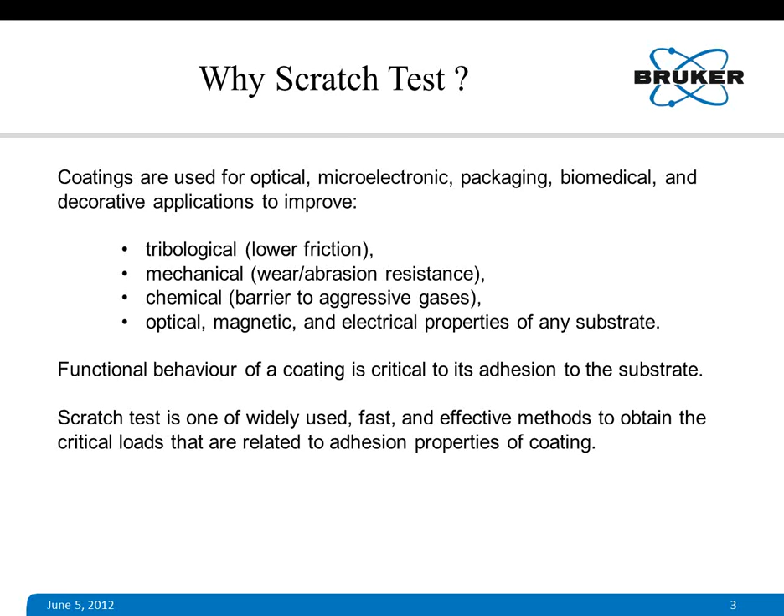Scratch test is widely used. It is a relatively fast process for evaluation of coatings and an effective method to obtain critical loads that are related to adhesion properties of coating.

Although scratch test is used for scratch adhesion properties of any coating, it is also used for measurement of hardness of any coating as well as bulk material. Although this seminar is mostly based on scratch adhesion test, I just wanted to introduce the scratch hardness test at the very beginning, just to mention that there is a scratch test which can give you scratch hardness of coating or materials. I will not cover this part in detail.

Those who are interested can refer to ASTM standard G171. In this scratch hardness test, what we do is take a sample and a reference sample—sample of coating or bulk material—use a stylus with a certain constant load, make a scratch, and measure the scratch width on the specimen. You repeat this test on a reference specimen whose hardness is known, say for instance fused silica or some polymeric material for low hardness specimens, and use an equation to obtain the hardness of the specimen.

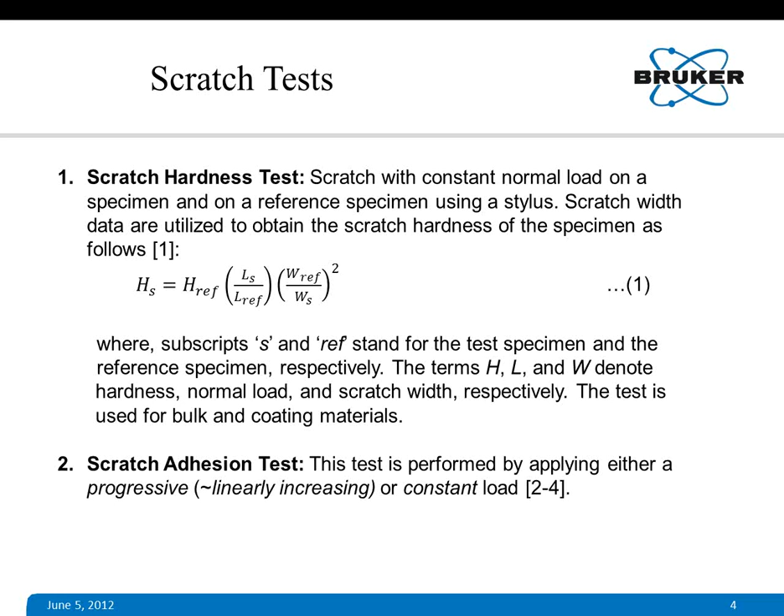Scratch adhesion test, the topic for today's seminar, is done by two different ways. One is progressive scratch test, where a linearly increasing load is applied during scratching, or constant load scratch test, where load is basically constant.

Progressive load scratch test is shown on this view graph. You can see there is a stylus used for this scratch test. It started somewhere at some point on the coating, and is dragged over the surface of the coating with linearly increasing load. Normal force, which is the load, and tangential force, or friction force or Fx, these two things are measured. After the test is done, optical microscope is used to have the image of the scratch. From the image, we can imagine where this coating is failing.

There are failures. Different types of failure modes may be present in a particular scratch test on a particular coating. We also measure other parameters such as acoustic emission or electrical surface resistance or contact resistance of this coating. The normal load corresponding to a particular failure mode is called critical load, denoted as LC. There may be several critical loads for a particular system or scratch test, and that's why they are known as LC1, LC2, LC3, and so on.

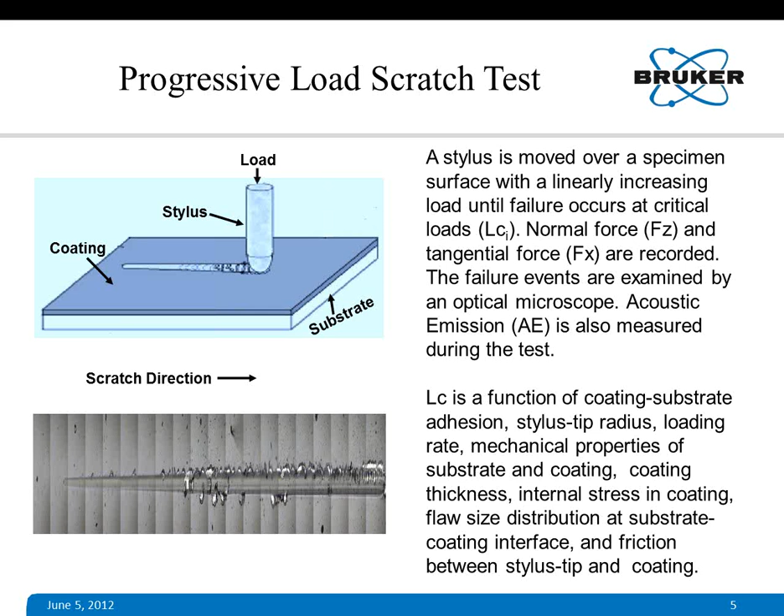On the other hand, constant load scratch test is done, as it implies, with a constant load. Load remains constant and you scratch at different load levels. So a series of scratch tests are performed with constant normal loads each time, but the level may be different, until a point where failure of the coating occurs. Each scratch is examined with an optical microscope for failure.

Sometimes the force, that is tangential force Fx, or other parameters such as acoustic emission or electrical contact resistance also exhibit sudden changes at the point of failure. They can also be used to pinpoint at what point failure is occurring.

The load at which such failure of the coating occurs is termed the critical load again. Constant load test requires more time because you have to do several scratches, a series of scratches, but it provides greater statistical confidence. Progressive load test is suitable for rapid assessment and quality assurance of coating. Hence, it is more popular for research and development work on coating processes. In this presentation, I will concentrate mainly on progressive load scratch test.

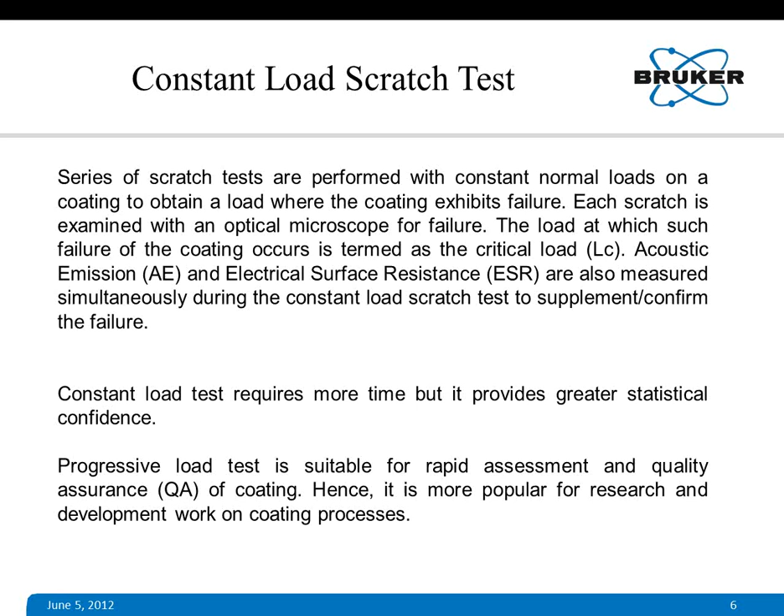Coating failure modes during scratch test. There could be two different types of coating failure. One is called cohesive failure, shown here on the right side. Cohesive failure means the coating fails itself; an example is through-thickness coating cracks. It doesn't fail through the interface of coating and substrate.

When it fails through the interface, that is called adhesive failure. Examples are buckling, spallation, chipping. Adhesive failure actually happens due to compressive stress present ahead of the crack or stylus tip, whereas cohesive failure happens with tensile stress. Tensile stress is the major driving force for cohesive failure.

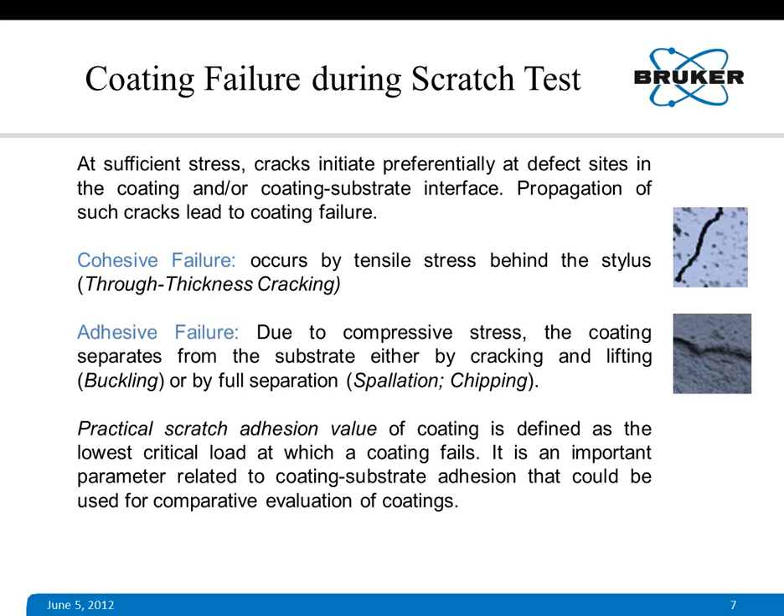Practical scratch adhesion value of coating is defined as the lowest critical load at which a coating fails. It is an important parameter related to coating-substrate adhesion that could be used for comparative evaluation of coatings.

Let's examine some of the damage features, how they look when you do a scratch. There will be several failure modes, several of them referred to in the literature, especially in ASTM standard C1624. Those who are more interested can refer to those standards. I tried to put together some slides here to show some of the major damage features.

I categorized them into two different things. One is like cohesive failure, like through-thickness cracking, such as brittle tensile cracking. These types of cracking can have nested micro cracks open to the direction of scratch. They can be straight, like chevron cracks, or they can be in the form of an arc, as arc tensile crack, as shown on the right side of this view. There can also be Hertz cracking, a series of nested micro cracks within the scratch groove.

There can be conformal cracking, micro cracks that form while the coating tries to conform to the groove. These open away from the direction of scratch. The direction of scratch is this way, and the conformal cracks open in the other direction.

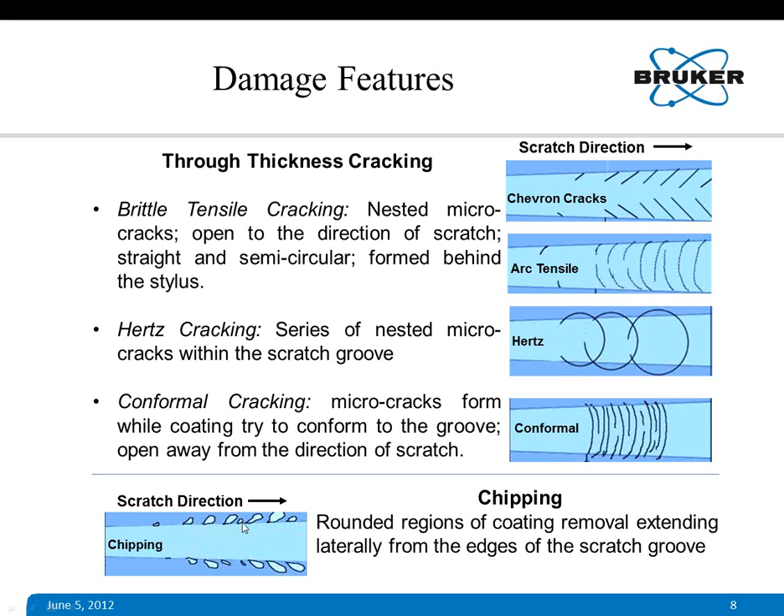Other types of damage features are chipping, which are related to adhesion failure. The chippings are rounded regions of coating removal on the surface of the coated specimen, extending laterally from the edges of the scratch groove.

Some other damage features related to adhesive failure are buckling, wedging, recovery, and gross spallation. These mostly happen due to compressive stress on the coating. Coating buckles ahead of the stylus tip, forming irregularly wide arcs with patches missing on the coating surface, and they open away from the scratch direction.

Wedging is similar, but here these are more pronounced patched areas where coating is actually removed by wedging. They form annular structures and open away from the scratch direction.

Recovery: regions of detached coating along one or both sides of the groove, oriented along the direction of the scratch, produced by elastic recovery behind the stylus and plastic deformation in the substrate. And gross spallation, where large detached, delaminated regions of coating occur, typically where the coating has very low adhesion strength, such as a ceramic coating on a substrate.

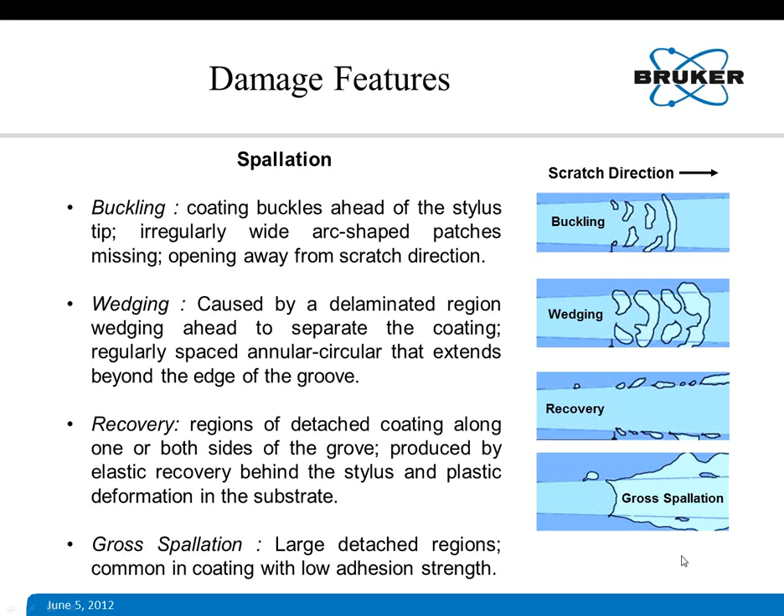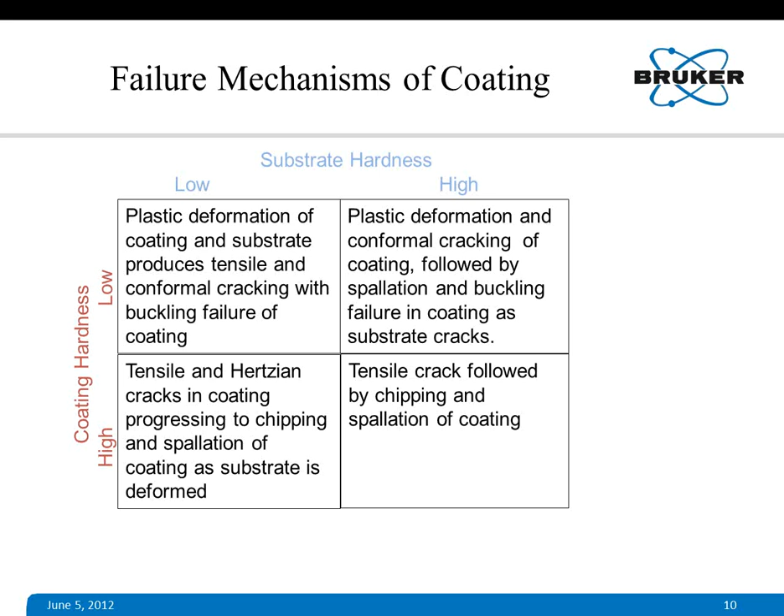Now we'll go through some of these scratch models available in the open literature. The Benjamin and Weaver model proposes two approaches, basically based on tangential force measurements at the tip, which is Fx, sometimes called friction force, and also based on normal force.

The first model, shown in equation 2, expresses the tangential force Fx in terms of hardness of the coating and substrate, Hs and Hc. Hs is the hardness of the substrate and Hc is the hardness of the coating. D is the scratch width, t is the thickness of the coating, and R is the radius of the tip, the stylus.

There are three terms in equation 2. The first term denotes the plowing force required to deform the substrate, and the second and third terms denote the force to remove coating from the surface and the plowing force required to displace the sheared film, respectively.

If we can find Fx, with Hs and Hc known, thickness of the coating T known, and scratch width D found, we can find the critical shear stress at the point of failure. That critical stress could be used for comparing several coated specimens. This particular model worked well for metal coated on glass specimens, especially aluminum, but it doesn't work for some other coating systems.

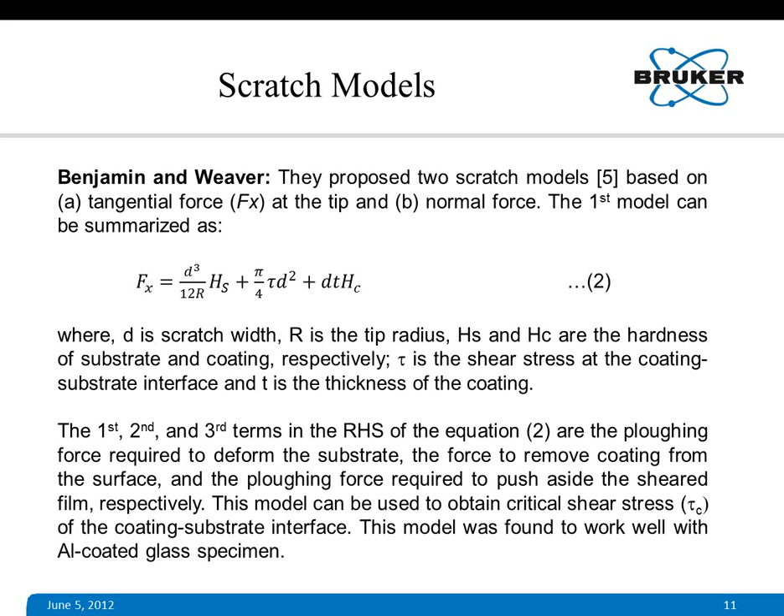The second model Benjamin and Weaver proposed was based on normal force, shown in equation 3, expressing the shear stress at the lip of the stylus tip in terms of hardness and contact radius between the tip and the coating, A, which is basically half of the scratch width.

This model gives a measure of adhesion in terms of critical shear stress by substituting A measured at the critical load.

Later, Ollivier and Matthews modified the second model of Benjamin and Weaver, equation 3, by replacing Hs with Fz, the normal force, divided by pi A squared, where A is the contact radius, half of the scratch width.

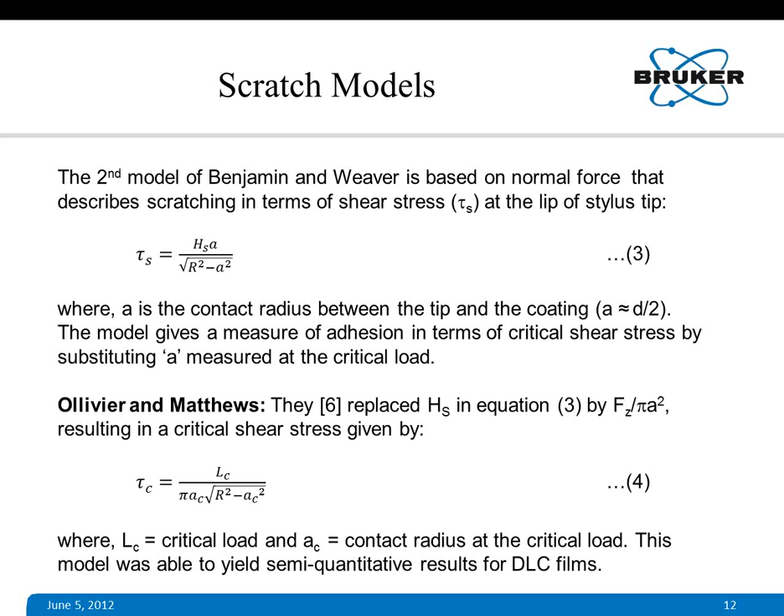They gave an equation shown as equation 4: tau c equals Lc divided by pi times Ac times the square root of R squared minus Ac squared, where Lc is the critical load and Ac is the contact radius at the critical load. This model was able to yield semi-quantitative results for DLC film, diamond-like carbon film.

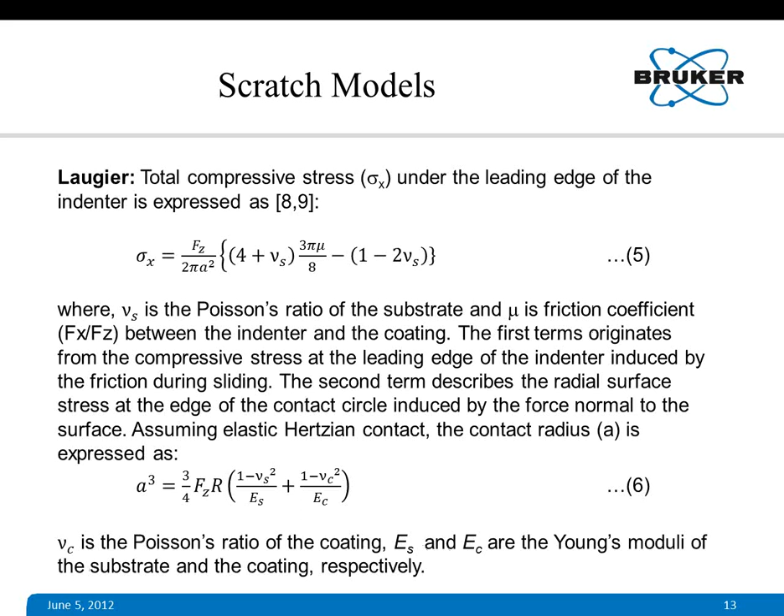Assuming elastic Hertzian contact, the contact radius A is expressed in equation 6 by Laugier. Using equations 5 and 6, we can calculate the critical shear stress of the coating, that is adhesion stress basically.

When this contact radius is very small compared to the radius of the tip, shear stress can be expressed as equation 7, tau is more or less equal to sigma x into A by R. So if we can find the tangential force at the critical point, we can obtain or calculate the shear stress, which in turn will give you the adhesion strength of the coating.

Laugier later on also introduced work on adhesion for any particular scratch test, which relates to adhesion strength of any coating substrate system. They expressed W equals sigma c squared by 2 EC into T, where sigma c is the critical shear stress, EC is the Young's modulus of the coating, and T is thickness.

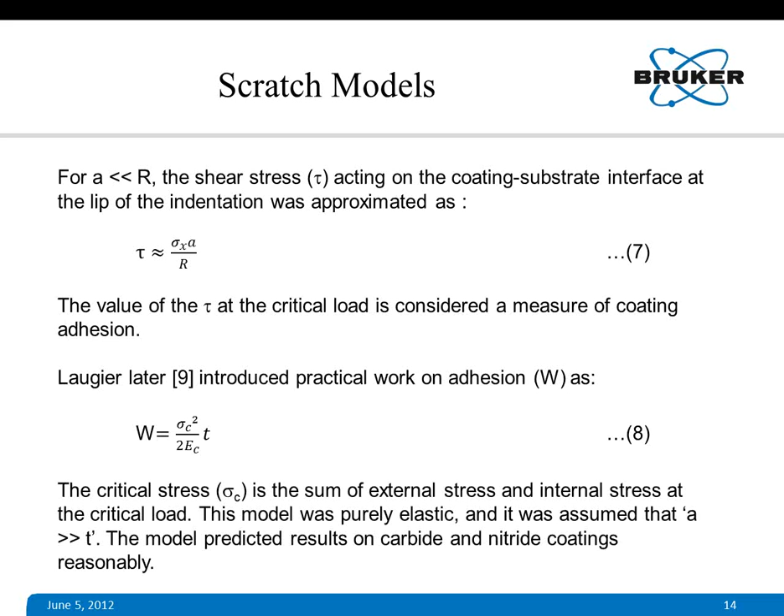This model predicted results on carbide and nitride coatings reasonably well.

Later on, Burnett and Rickerby considered elastic plastic indentation stress, internal stress, and tangential force, and put forward a model for calculating the critical load LC equals pi d squared divided by 8, into 2 ECW by T to the power half, as expressed in equation 9, where W is the work of adhesion, and this is everybody's aim to find out for any coating substrate system.

EC is the Young's modulus of the coating, and T is the thickness, and DC is the scratch width at the critical load. So if LC can be found out by a scratch test, and all other parameters are known, W can be calculated using this model.

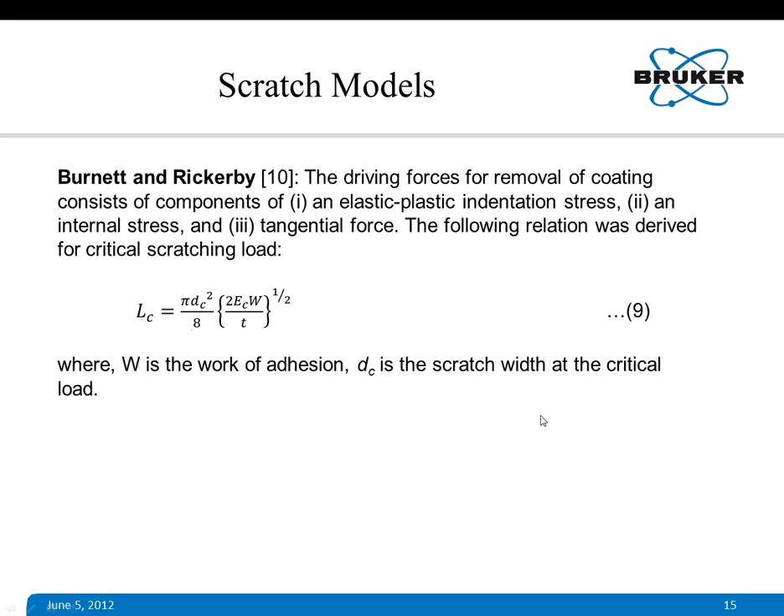Bull et al., S.J. Bull, they have worked a lot on this coating system, and they define critical load by replacing the area term in equation 9, pi d squared, with AC by nu c into mu c, where nu c is the Poisson's ratio and mu c is the friction coefficient, also called the drag coefficient, friction drag coefficient, or stylus drag coefficient.

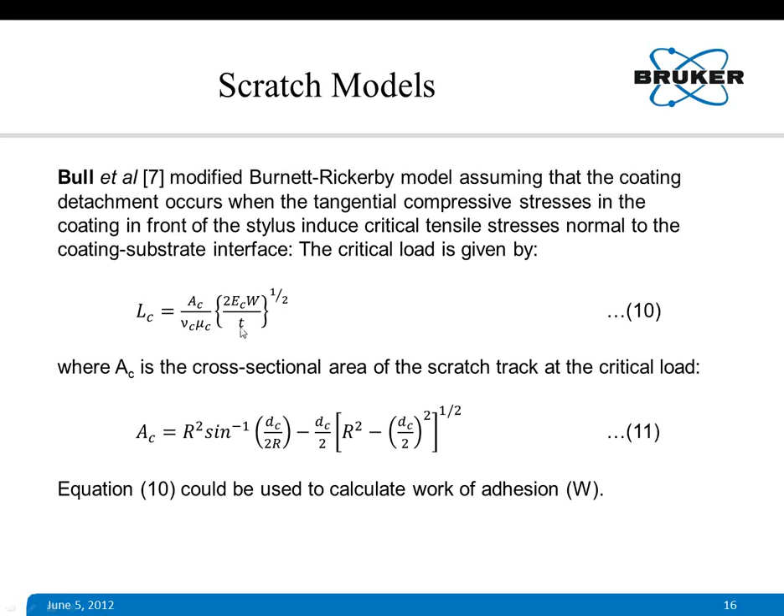A is the area, the cross-sectional area of the scratch track at the critical load, A is AC, and AC is actually expressed in equation 11. Using equations 10 and 11, this is the total model, we can calculate the work of adhesion.

Although we have several more models, which will be very difficult to cover here in this short webinar, all these existing models invariably use some assumptions and simplifications to deal with the inherent complexity of any scratching process, which involves a large number of variables. Hence, the existing scratch models experience great difficulties giving a complete analytical description of the mechanics of scratch testing.

Predicted scratch adhesion values from such models differ widely from the actual scratch test results. Evaluation and fine-tuning of such scratch models certainly requires continuous developmental effort, with an objective to obtain a standard model that would give a comprehensive description of any scratching process.

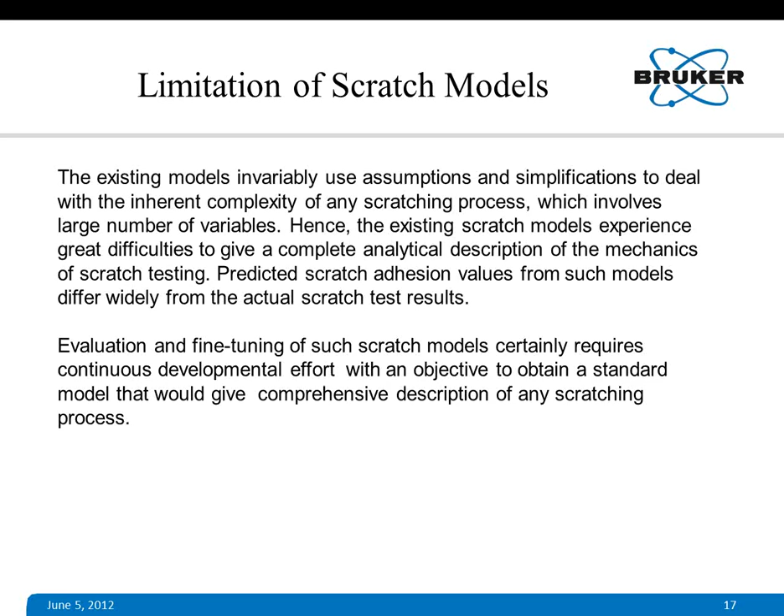While we wait for that, for all engineering purposes, we use some practical approach for scratch testing. In practical approach, what we do is take a stylus, which can be diamond or some other hard material, and apply a progressive load from a very small load to a high load, linearly increasing.

We drag over the coating surface and find out by several means, maybe by optical microscopy, where this coating is failing, or by measuring the electrical contact resistance. If the substrate is electrically conducting, by continuously measuring the electrical resistance between the stylus tip and the substrate, we can easily detect the point of failure when the tip actually touches the substrate.

The resistance drops to a very small value, and we know where it is failing. Say for instance, R is changing, it dropped at this point, and also the tangential force, Fx, started becoming unstable at the point of failure. It changed abruptly. So this is a practical approach where we find the normal force, or critical normal load, where coating fails.

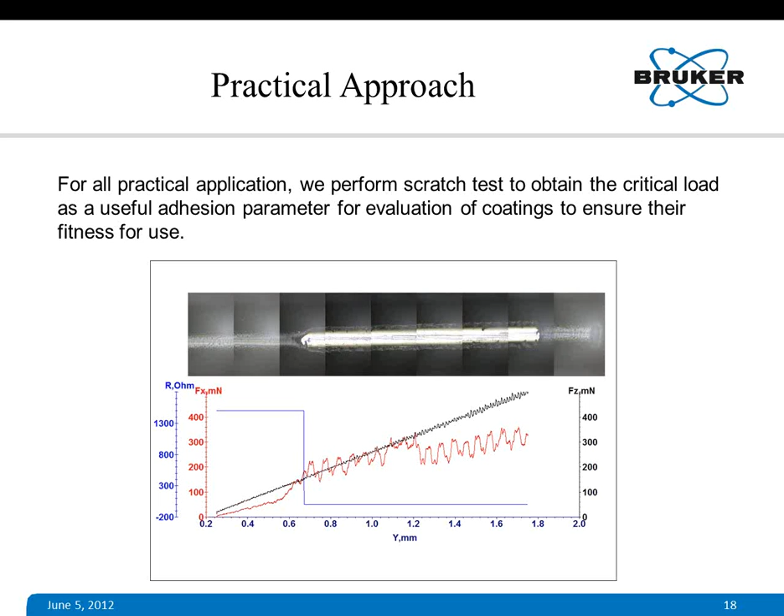This particular parameter can be used as a comparative parameter for comparison of several coatings. If it is pretty high, it implies that coating is good, scratch adhesion of this coating is good. If it is low, means scratch adhesion is low.

Bruker has a scratch tester. The model is known as CETR-UMT, and it can perform several kinds of scratch testing, almost all kinds. It can perform constant load scratch test for hardness and adhesion, progressive load scratch test for practical adhesion, and it can measure several things like electrical contact resistance and electrical surface resistance.

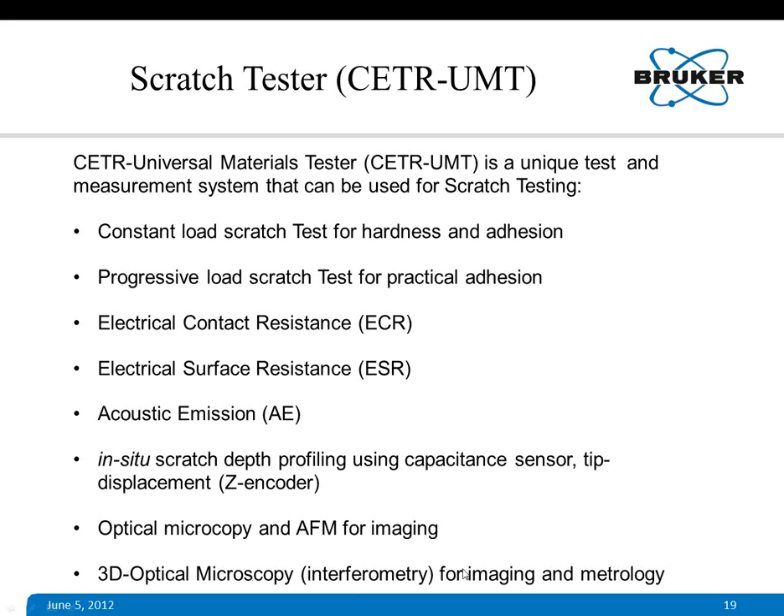This is very important when we deal with electrically conducting coating on non-conducting surface. It can also measure acoustic emission, in situ scratch depth profiling using a capacitance sensor, which measures the depth of the coating as it scratches, as well as the scratch depth and tip displacement. This is another parameter which can be measured in situ to get the profile of the scratch. Optical microscopy and AFM are used for imaging after the scratch is done, and 3D optical microscopy, related to interferometry, is also used for imaging and metrology of any scratch.

Here are two pictures just to show that it can have an optical system for imaging or AFM. It also has a head and a profiler for imaging and metrology after the scratch test.

It deals with one drive which actually moves the specimen for scratching. We can also either move the specimen or the tip by using two different kinds of drive systems, slider or linear.

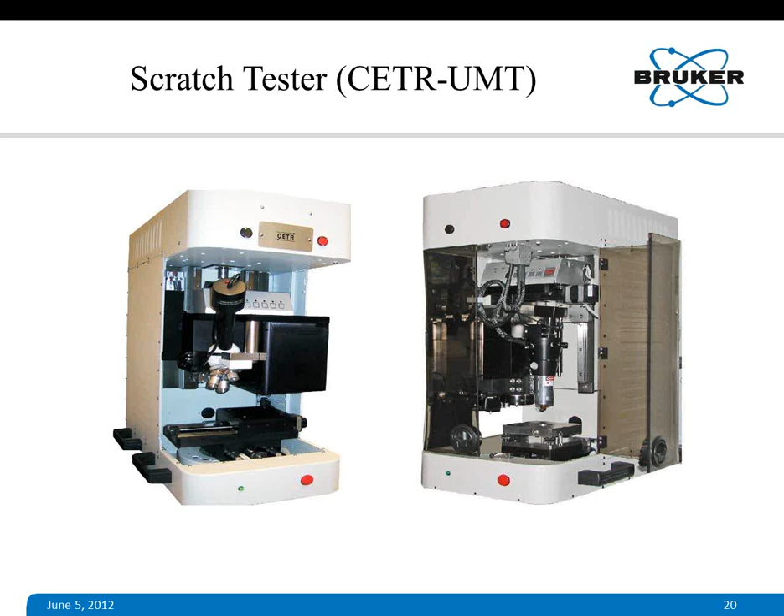It can accommodate several different probes, such as acoustic emission, ECR, ESR probes, which can be simultaneously measured and recorded along with friction force, or tangential force, and normal force. In that linearly increasing scratch test, normal force is controlled by a feedback loop connected to the sensor.

Now I will present some of the advanced scratch test results obtained using the CETR scratch test. This test was done on DLC coating on steel substrate using a diamond stylus with a 12.5 micron tip radius.

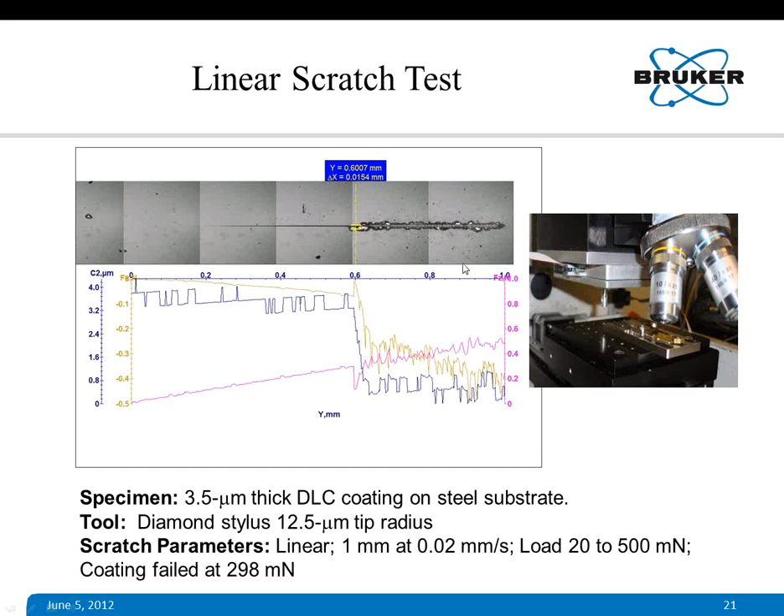The sample is mounted on the stage. The tip is here, and it comes in automatically based on the script—you just specify what to do, scratching or image scratching. It scratches, and the optical head automatically moves to the place where the scratch exists, takes a series of pictures, collates them all together, and plots them with the Fx and Fz data automatically.

Here is one profile using an interferometer, which we call K0, of a scratch. This is similar to the earlier one I presented in the previous view graph, and it shows the coating thickness is about 3.5 micron.

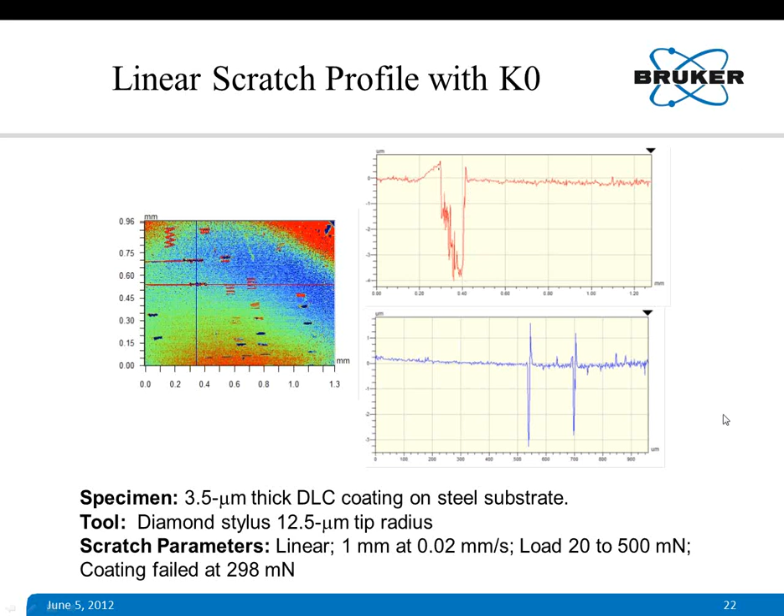Another linear, or progressively increasing load scratch test, was done on 1 micron thick DLC coating on titanium substrate. Here is the setup shown on the left top. A Rockwell tip was used, with 200 micron tip radius. You can see that the coating failed at around 25 Newton load.

This is COF, which is basically the ratio of tangential force, Fx, to the normal force Fz. The COF directly shows the coating failure, which is corroborated again by the optical image.

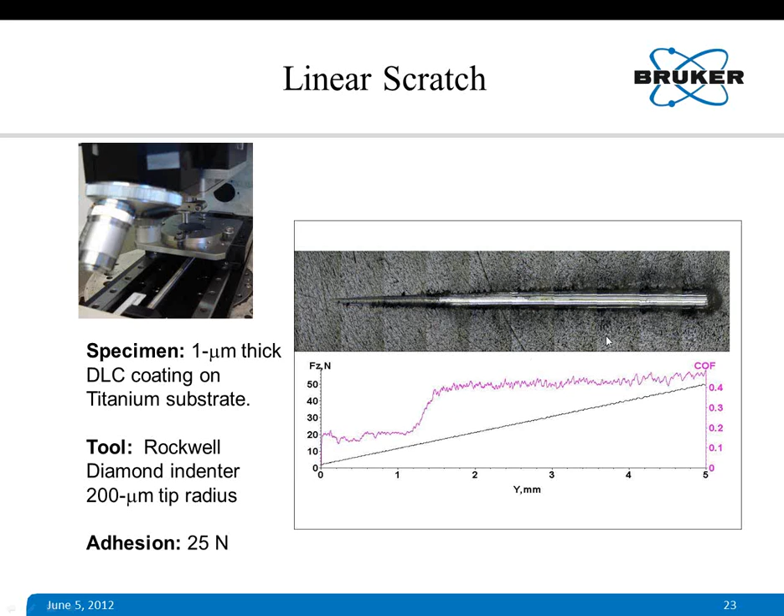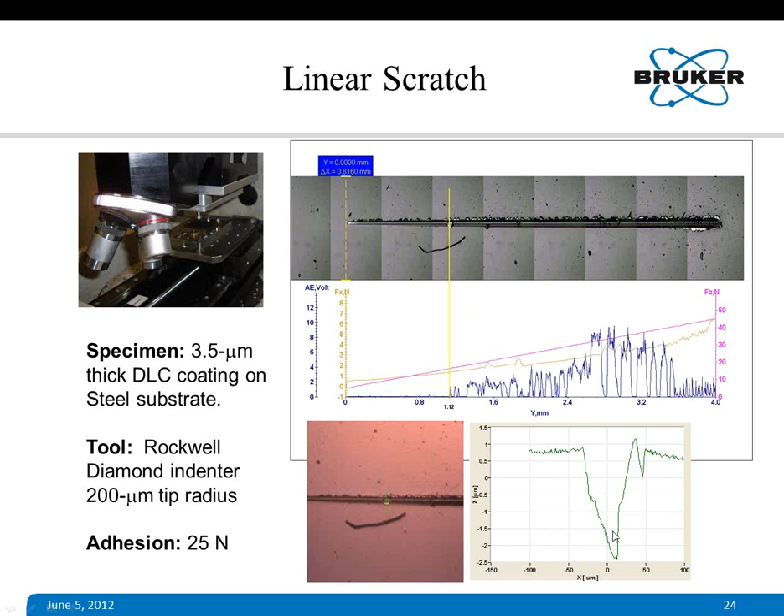At the point of failure, we did a profile of the scratch, and you see the profile here, which shows about 3.5 micron depth of the coating.

Here is another example of a progressive scratch test with depth profile. This was done on a relatively thick coating, 40 micron thick polymer coating on steel, soft coating on steel. This test was performed with a microblade, tungsten carbide microblade with tip radius 400 micron.

It's very sharp. The microblade was used with an objective to measure ECR signal, because tungsten carbide is conducting, diamond is not. We use a microblade to scratch this coating with linearly increasing load, and we found that at a certain point, when the coating is scratched completely, the ECR signal drops to almost near zero.

From this we find out the scratch adhesion force, corresponding Fz force, which is the scratch adhesion force. During such scratch test, we can also perform scratch depth profile, which is shown at the bottom figure here.

Here is what we do in this case: we do a pre-scan to know the surface of the coated specimen. There may be a tilt, so we want to evaluate that, and then we scratch it with progressive load scratching, and then we do a post-scan to measure how much elastic deformation was there, and what is the actual permanent deformation after the scratching.

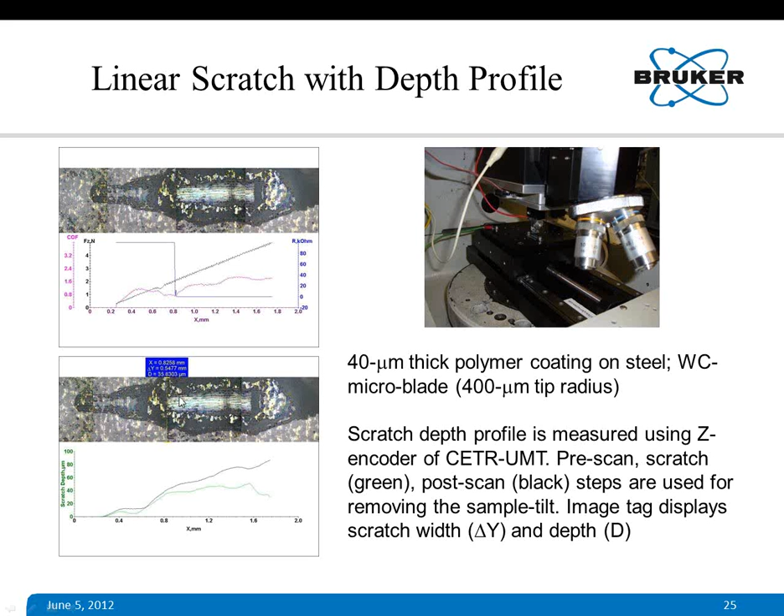In our software, we have a system of image tagging. You just click on the image anywhere, and you will see the width of the scratch and depth of the scratch. D is the depth, and delta Y is the width of the scratch. All these things can be evaluated in a few mouse clicks.

Another linear scratch, this time on a very soft coating, like zinc coating on steel. And you see in this case, since both the substrate and coating are conducting, it's very difficult to evaluate the ECR signal here.

Now, it's easier to perform AE measurements on this. You can see acoustic emission measurement shows when this stylus cuts through the coating and started scratching the steel substrate. Lots of acoustic emission events are exhibited by this process, and we can pinpoint where it is failing.

There is not much indication on the lateral force measurements. There is some kind of instability which started somewhere here at a very small load, probably about 5 Newton, but actually the complete failure of the coating occurs at about 10 Newton, somewhere here, which is confirmed by acoustic emission measurements.

So these acoustic emission measurements, resistance measurements, and lateral force measurements are different parameters which will definitively indicate the point of failure of the coating, from where we can calculate the scratch adhesion of a coating that can be compared with different coatings.

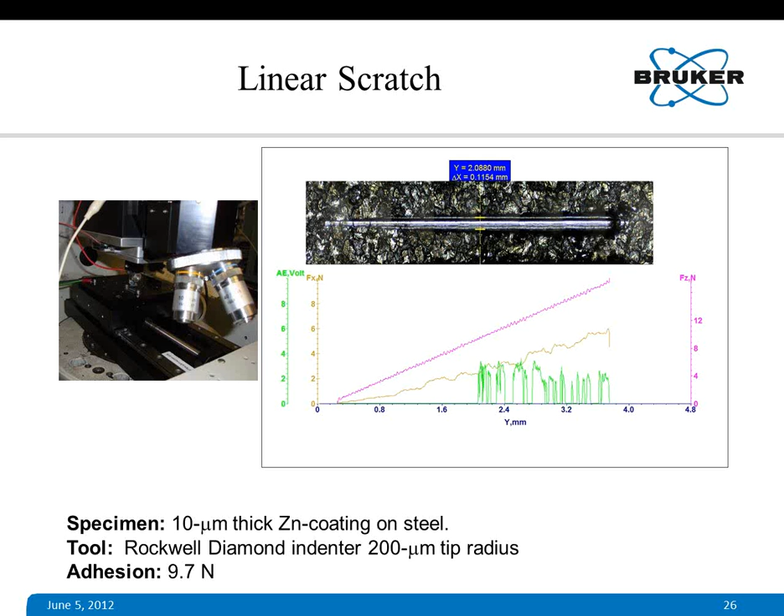On that particular specimen, we also did pre-scan, scratch, and post-scan measurements. Our software allows us to do adjustments, like tilt corrections based on the pre-scan measurements, and those corrections apply to both scratch and post-scan to have correct values of depth or scratch profile during scratching as well as after scratching. This happens automatically during the scratch test with the procedure of pre-scan, scratch, and post-scan.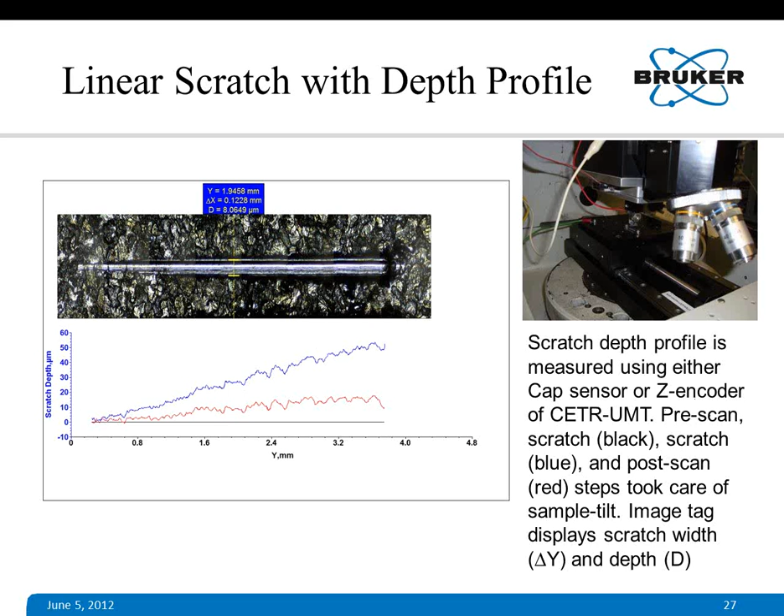Here is another example of pre-scan, scratch, and post-scan using a tungsten carbide blade.

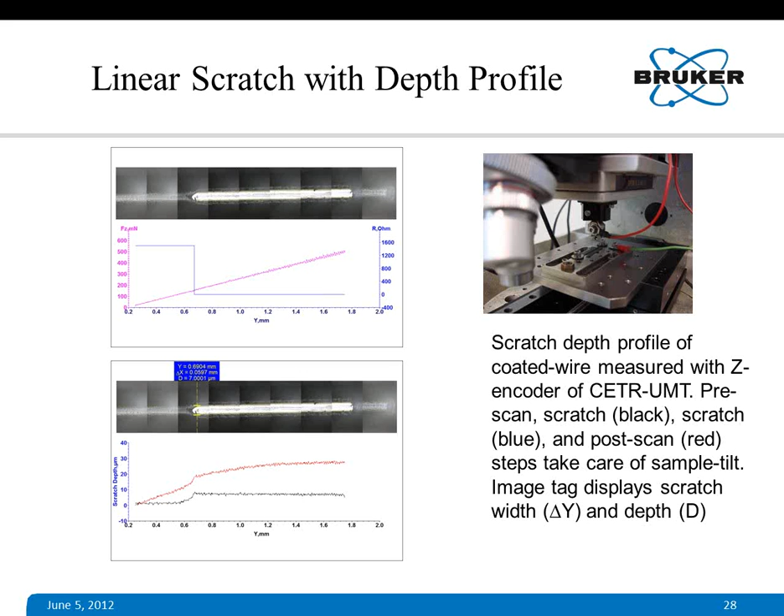CETR-UMT can also be used for doing a different kind of scratch test. Here we use a linear scratch but with a constant load, using the flat side of a tool-steel microblade. You see here on this there is a bump, or a polymer dot, about 1 millimeter diameter and height about 25 micron. You install the blade somewhere here, apply a load, say 4 Newton in this case, and move the blade over this without changing the Z position.

At a certain point, it will just scrape through these polymer dots, and you see the friction force or lateral force at the point of starting the scratch.

It increases linearly and goes down as it removes the dot completely, scratching through the dots. The area under this fx with distance curve—here it's a time plot, but this can be converted into distance because you know the velocity of stylus movement. From this area, when plotted as fx versus d, we can get the adhesion energy of a particular polymer source. These comparative numbers can be used as parameters for comparing several coatings. This gives not force but directly adhesion energy—the energy, or work of adhesion, required to completely scratch through this type of dots.

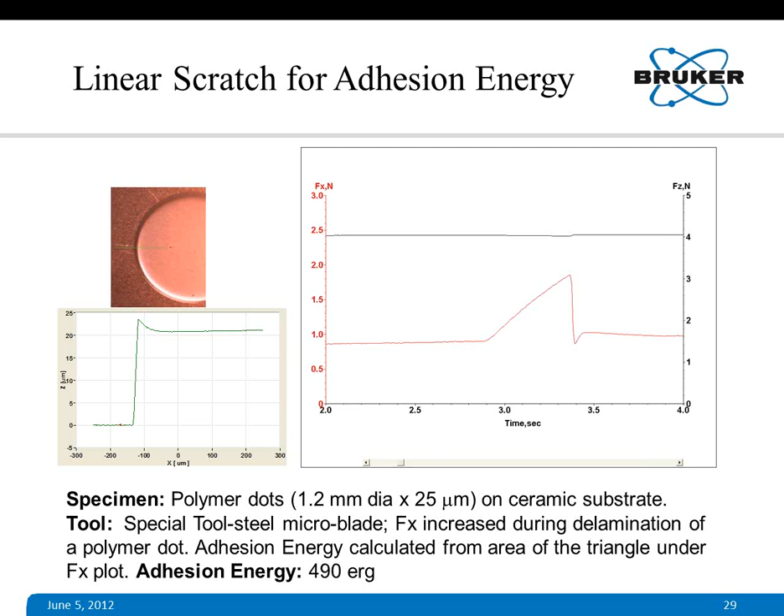Now we'll go for 3D scratches. CETR-UMT is a versatile instrument which can perform different kinds of tests. In scratch testing, not only can we do constant load or progressive load scratch tests, but we can also do a 3D scratch, where we're testing with an increasing load along the x direction using the stylus. At the same time, the same specimen can move back and forth using the linear drive, creating a series of very fine scratches, and the distance between two series of scratches can be well controlled using a script.

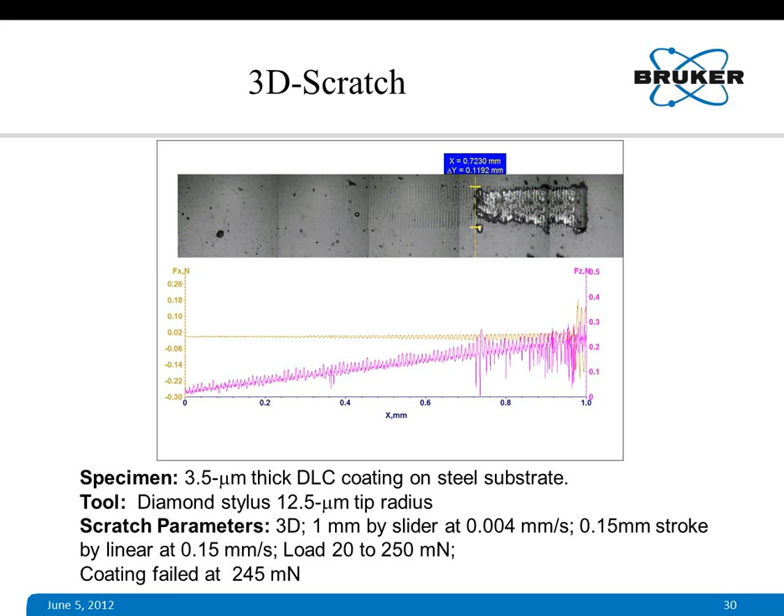We can also perform XY scratch with reduced spacing or different kinds of scratching. This view graph shows that you can scratch with a constant load in two different motions continuously, without lifting the stylus, and reduce the subsequent spacing of the scratch until it leads to failure. In this case, the last spacing was about 10 microns between two subsequent scratches along the y direction, and it did not fail—the coating did not show any delamination.

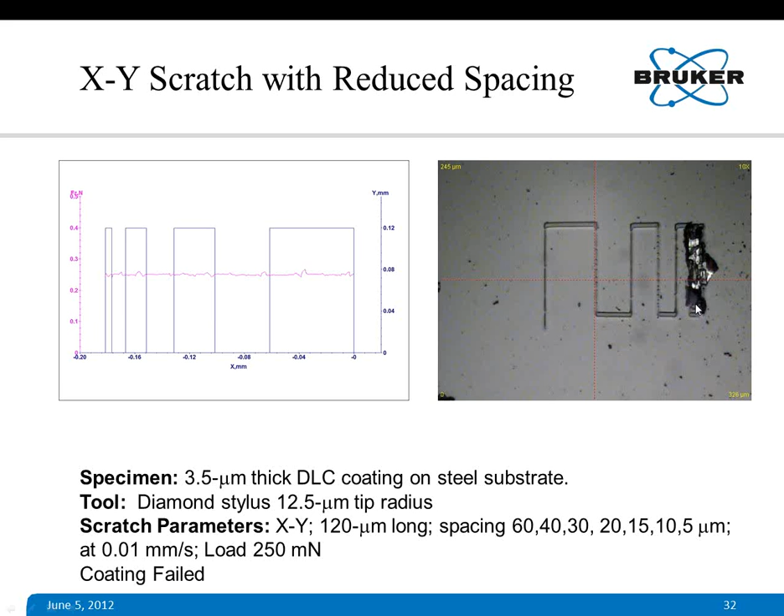But when this spacing is reduced to 5 microns, the coating failed. This implies that pre-stressing by making a series of scratches has a lot of influence on the failure of the coating by delamination. So in this case, it fails when the distance of separation between two successive scratches was reduced to 5 microns.

We can also perform angular scratches at any angle—we can program it, write a script to perform this kind of scratch. And again, at the end, when it didn't move the slider, the coating actually failed.